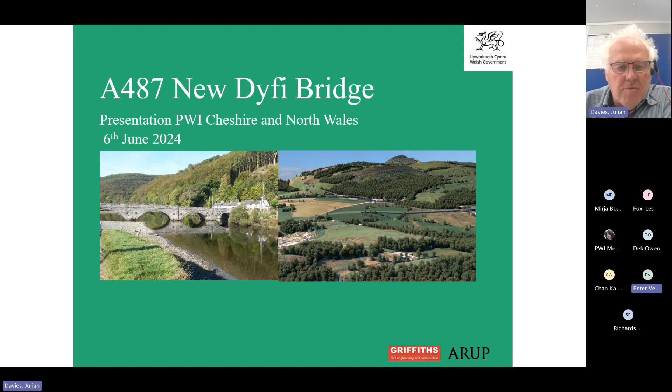Right. This scheme, the New Dyfi Bridge, is located in the Dyfi Valley, where frequent flooding occurs in the winter on the trunk roads network. It's located between the old Dyfi Bridge to the north and the railway line just to the north of Machynlleth. As a result, this section of road is frequently closed. It can flood up to 7-8 times a year, obviously resulting in communities being cut off sometimes for 24 hours, up to three days during a flood event.

It results in a diversion of 30 miles, and I'll explain in a minute the location. It's on a route from the north of the bridge, from the South Gwynedd area, quite a large geographical area, which runs to the nearest hospital in Aberystwyth. So the scheme itself is 1.2 kilometres long, but the viaduct is elevated over the floodplain. It's a 724-metre long viaduct, 20 spans. And obviously the idea of this scheme is to improve the resilience of this strategic trunk road route, one of the main routes in North Wales, and to provide connectivity for education, healthcare, and the rest of it, right?

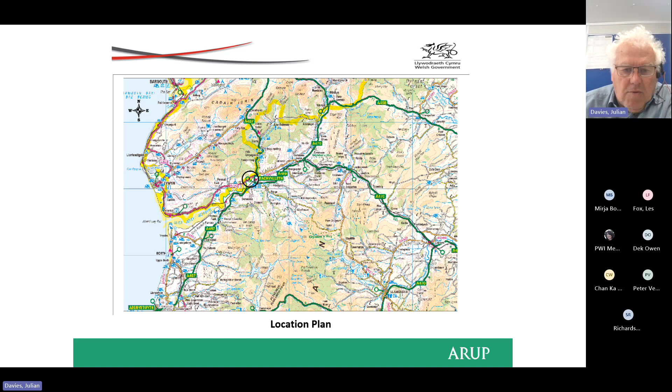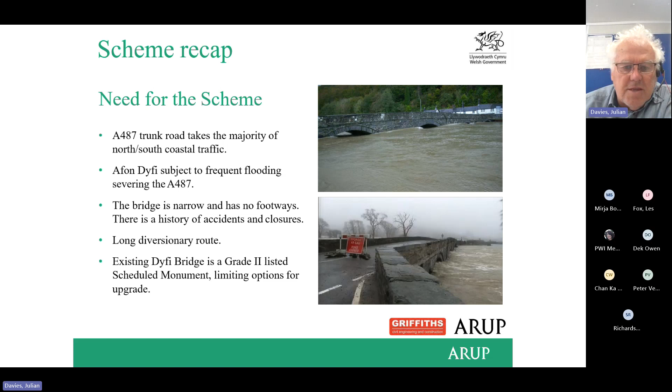Why are we doing it then? I said the road floods. That's the existing bridge, nearly 200 years old now, a masonry arch bridge. Substandard, narrow, low parapets, gets regularly hit by vehicles. And again, it's closed for repairs, or if not, for this flooding. It's a listed structure, so you can't do much with it. It floods south of the job under the railway bridge there, which cuts off the town. That's just the north of Machynlleth.

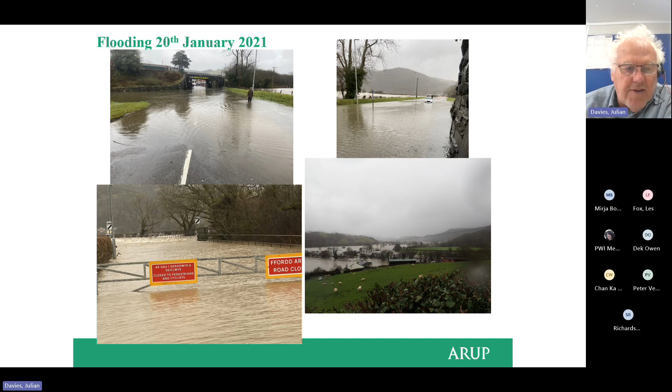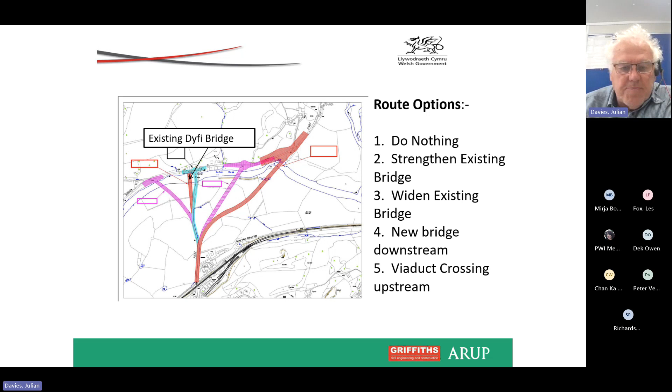They looked at online improvements to the west, and improvements upstream to the east side of the existing road. The online and western options were not appropriate. You couldn't get enough elevation. You ended up on a section of A road here, the A493, which is very substandard and would have required a lot of improvement to upgrade to trunk road. The two solutions on the east were preferred. The purple route there would have ended up with a roundabout in very steep sidelong ground, meaning massive earthworks. So the chosen scheme at key stage 2 was to take that route from the 487 just north of the Eco Park and drop back onto the line just north of the river. The scheme requirements from the Welsh Government were very prescriptive.

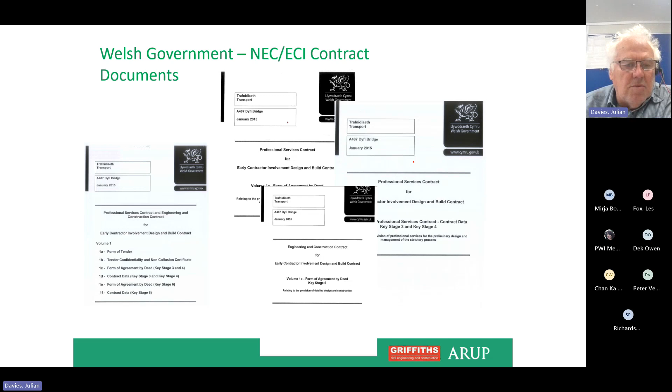One of our major solutions at tender stage was to straighten out the alignment and push launch the structure, because it's a very difficult site with the flooding, very poor ground conditions. So we thought we would push the structure out over the floodplain from one location on the south. We would then save all the wet trades. We would use precast units on the deck. So all the environmental pluses from that, quality issues, and reducing all the risk of working in a floodplain.

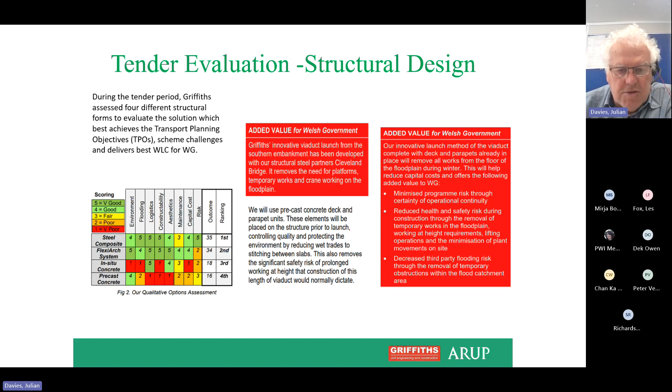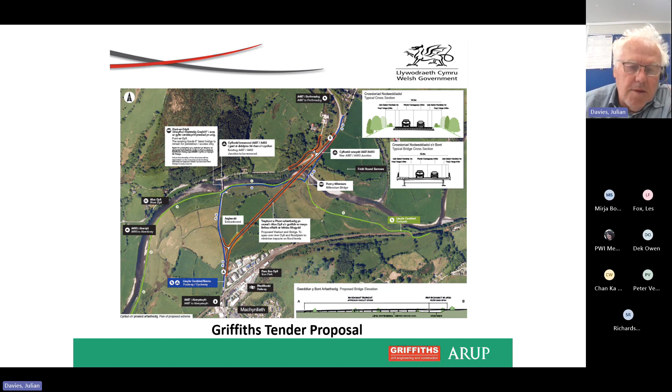And the scheme we ended up with was 170 meters longer. So we took out the embankment, extended the south abutment right through to this location here at the edge of the eco park. So we'd extended by 170 meters with a curved section of viaduct, with the original 550 meters there. So we ended up with a 720-odd meter long job.

There was this embankment obviously to take this up to a level to get it above the flood water. And you can't see it well in this drawing, but there's also an embankment to be constructed around this eco park, a little business park here, to protect it from the flooding, as part of it had flooded already during a flood event. So just to give it 1 in 1,000 year protection.

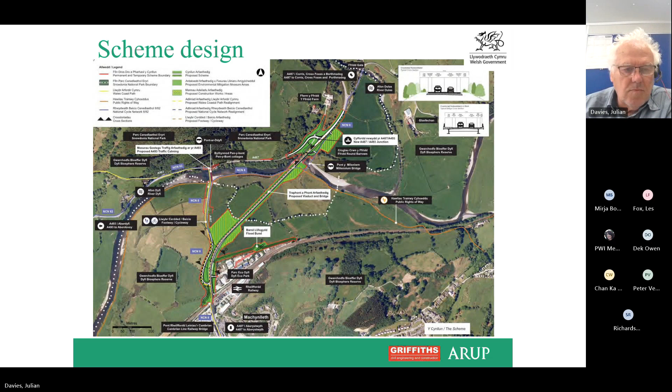For my discussion, I'll be splitting the structure because I'm going to concentrate on the structure. So I'll be referring to the curved section, which is this south section here, roughly 170 meters long. The ladder or straight section for the middle, which is where we did the push launch. And then we'll refer to the river crossing, because this again was a different construction. Rather than a ladder deck, it was a multi-beam, because the spans were much larger, 50 meter and 75 meter spans over the river. I'll be talking about those.

So a part of the BIM model there, you've got the steel deck, you've got these reinforced concrete columns, and a pile foundation extending some 28-30 meters into the gravels below. You've got a pile foundation to the southern abutment. We land across the river onto a spread foundation at the north abutment here. We didn't put piles here. There was no rock found across the valley floor. We hit some rock right by the river at Pier 19, and there was rock underneath the north abutment, but it was quite poor quality. So that's the shape of the thing.

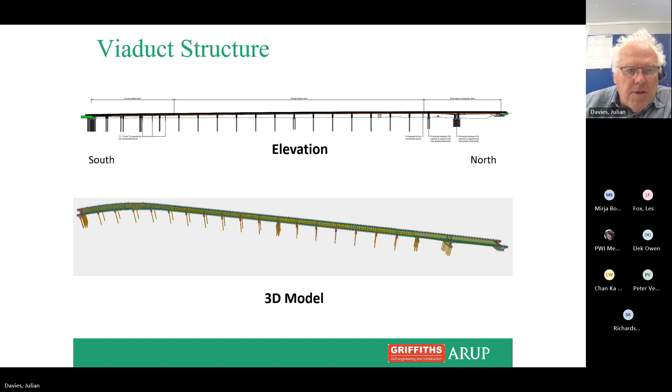We need to discuss a bit more detail, I suppose, of the structure itself. So we've got the 3 sections. This is the curved section where we've got these monopiles, 1.2 diameter, some 30 meters long through the gravels. Now, there's no pile cap here. The reason we tried to design out the pile cap was to reduce work in this very poor quality silt material. Otherwise we'd have had cofferdams, which you'll see we had to put on 1 or 2 of them. Extensive sort of temporary works.

So this was a monopile, 1.2 diameter, covered in a 2 meter reinforced concrete column with a ladder beam construction on top of it. It was the same through the main push launch, but then we go over the river spans. We have these 4 bigger beams called the multi-girder, which span 50 meters and 75 meters over the river.

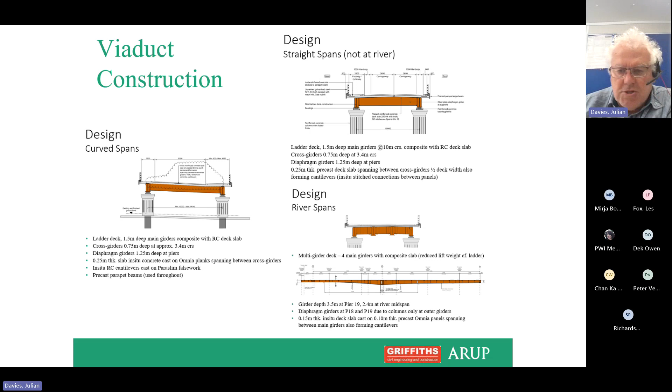This proved to be very environmentally and carbon friendly, because we reduced a lot of excavation, a lot of concrete, reinforced concrete, steel, etc., and much quicker, which you'll see from the photographs as I go through the presentation.

So, as I said, it was an ECI process. We actually won this contract in 2015. We took it then through key stage 3, which is design development, where we actually realized the flooding was a problem, and we developed it right through to public information events, environmental liaison groups, producing the ES, and then eventually we went to draft orders.

We managed to prevent a public inquiry because we managed to engage with all the stakeholders and remove all the objections. So we then moved on to key stage 4, which is the statutory process. So the draft orders were issued, objection periods, ministerial decision was made to progress the scheme, went through a whole High Court challenge. So at the end of March 2020, we were ready to go.

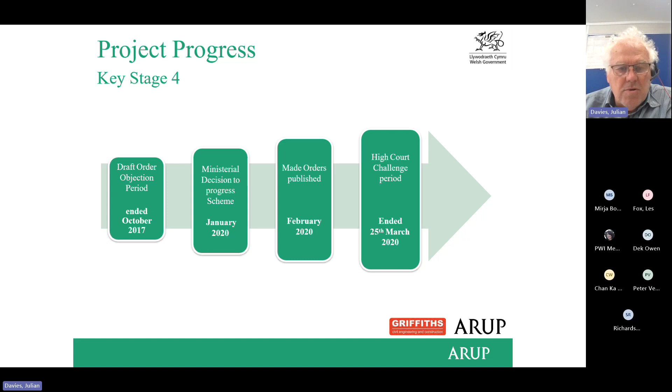But as we all know what happened then, COVID hit us. So we were just about to embark on some ground investigation and the job stalled. We eventually got back onto site to do the key stage 6 construction, and we commenced construction in spring. It was April 21. Now that actually gave us time, and one of the drawbacks to my mind of ECI jobs is that the design stage is missed out. So we were able to develop the design through the period where we were on hold during COVID.

So when we started work on the scheme, we had design drawings, and the biggest problem was actually, not delay, but critical to the job was ordering and delivery of the steelwork. So we were able to progress that procurement of steel very early on. So we moved on to actually doing the groundwork, but there were a lot of diversions. We actually put in the piling, we carried out this summer, and then we progressed through construction.

We finished the push launch very well. It all went well in about 15 weeks. Very good progress on that. And then we managed to get the steelwork erected over the river before Christmas in 22. We left it last year.

Then we were at a good place this time last year with all the concrete finished, and we were doing the finishings like waterproofing and all these dry weather jobs we thought were coming in the summer. It was wet in this area for 6 months from August right through to the new year, and it never stopped. So we were delayed with all that, but eventually got the bridge finished in February this year, open to traffic.

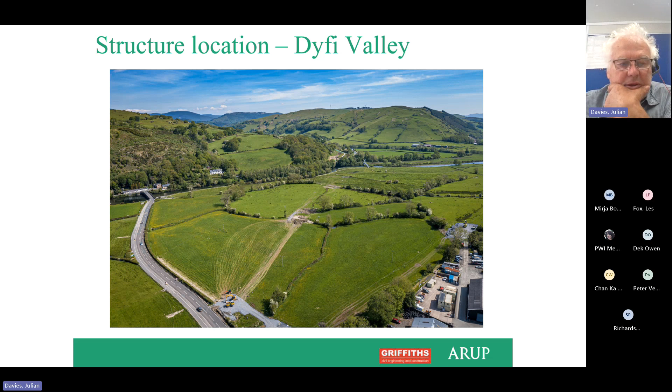So that's a view of the scheme before we started. This existing trunk road in the south here, and to the left of the picture, the old bridge. We were going to cut across that line, so we started to mark out the line of the structure. We were also starting to build the flood bund along the eco park. The ground conditions were very poor. You can see the standing water here.

We had to get haul roads out to get from the road to the river, which is about 500 meters, because we had to take steelwork and all materials down to the bridge to the south of the river. So we had a compound area on this floodplain here. We did raise an area which was out of the floodplain where we had some offices and a refuge for plant.

But we actually used timber matting to make the haul road, which we also then doubled up on to use for the piling platforms, and that was a bit of a success story because we just retrieved most of those now, and they're all still of some use. They were really useful, and we all know timber floats during a flood, so we had to moor them down with ropes. But that was one of the success stories.

You can see the flood bund on the right there, which runs up alongside the eco park. That had to be done early in the job because our work was going to cause further problems here. We were obviously then working very adjacent to the railway, and we had some interface with Network Rail to actually build our bunds into their work.

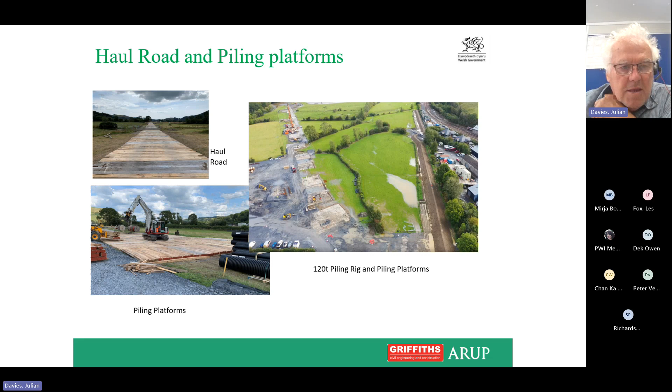So we started piling. This is the 120-ton rig here. This is a 1,200 diameter CFA continuous flight auger pile, which goes down to 28 meters. In that photograph there, you can see them. They actually plunge in the steelwork. So they bore the hole. They then tremie the concrete in through this auger, withdraw the auger. They then plunge the steelwork into the pile itself.

And there were 40 of those we did. We had to be very accurate with those locations because, as I said, those go up onto a 2-meter diameter reinforced concrete pier. We had to be within 25 mil with the piles because any eccentricity on that would cause a problem for the loading.

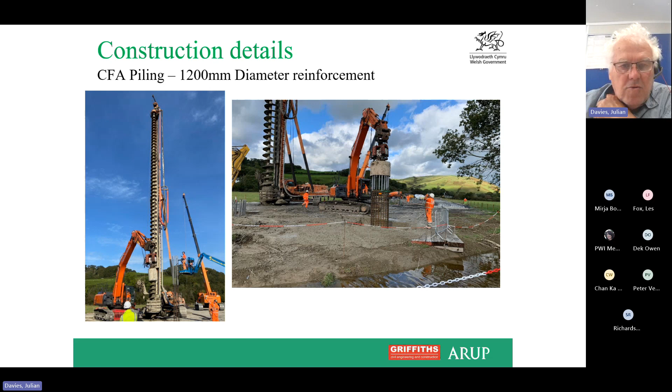This is where we had to do some cofferdams. Pier 19, the middle pier, was located on bigger foundations because the loads were heavier. So at this location, we had to put a pile cap, a reinforced pile cap, and there's a series of 750 diameter piles there. We had these on two of the columns where the loading was higher, but you can see the extent of the temporary works that were required to put these pile caps.

So when we just had the monopile, we were actually saving a lot of reinforced concrete, time and effort. So there again, you see the pile cap. The slabs are poured and the reinforcement is coming up here. And this is a monopile where we broke down about 600 mil below ground level just to found our piers. So the amount of work in these different scenarios was amazing.

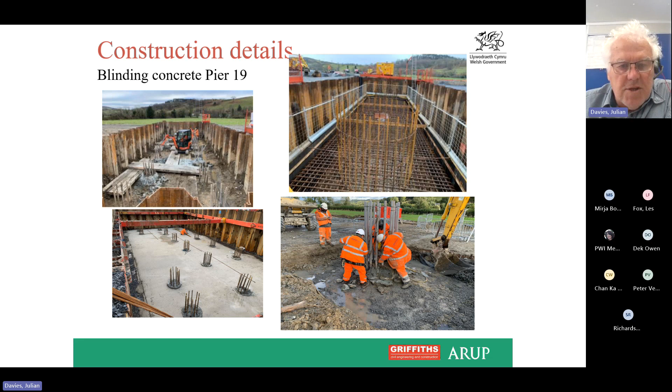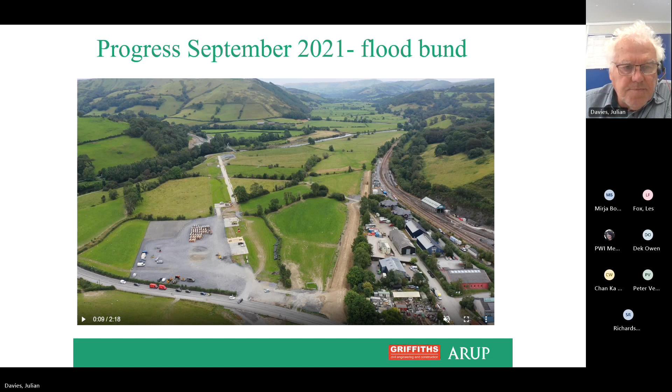So we started to progress. Obviously, the compound was developed. These are the timber mattings coming into our haul road. There's the flood bund, pretty well complete now. This is the railway line coming across here. This is the new scheme with our flood bund going around the eco park.

We had to interface with the rail embankment at this location here, which was quite close to the running rail, and that's on the western end. At the eastern end, it wasn't so close because there were some old sidings here, so there was a bit more room. But we did liaise with Network Rail right through the scheme. They were obviously concerned with the geotechnical influence of what we were doing, and you can see the influence lines here. So we actually tied into the embankments by benching in, all supervised by Network Rail and approved by the geotechnical design.

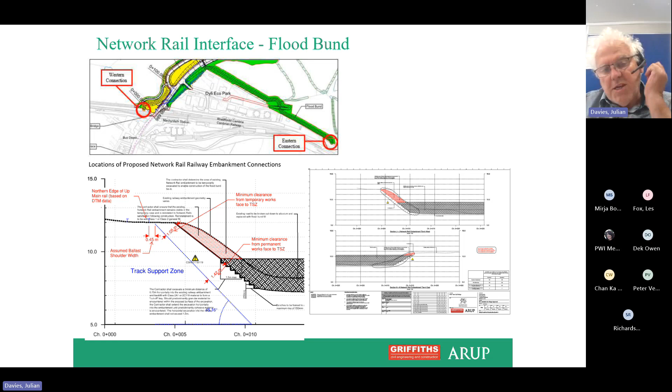It all went fairly well. You can see from these photographs, there's the rail embankment. We were building up and tying, benching in with this shape: 1 meter on the top, 1 in 2.5 side slopes, approximately 2 meters high. So it wasn't a massive embankment, but we did tie into the embankment. There were no issues there. There's been no problem. It doesn't really affect it.

There's the bund as well. You can see it tied into the embankment there, and then it's running parallel with the railway line and ties back in at the eastern end there. So again, you can see the bund there. Look, it's grassed over now, so it's blended in quite well. And at the south end, it comes round and ties into the running rail. There's the running rail there. This is Machynlleth Station.

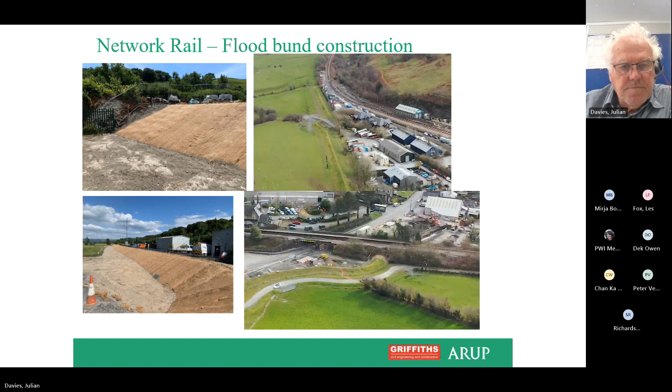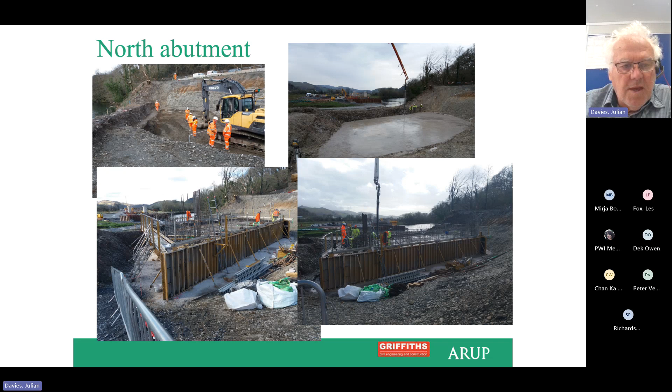Right, the north abutment. The abutments were conventional reinforced concrete structures. This one on the north was done without any piling, just a big spread footing. No real issues there, standard construction. And when we finished that, there's the finished structure there, so that was pretty straightforward construction. Cantilever wing walls there.

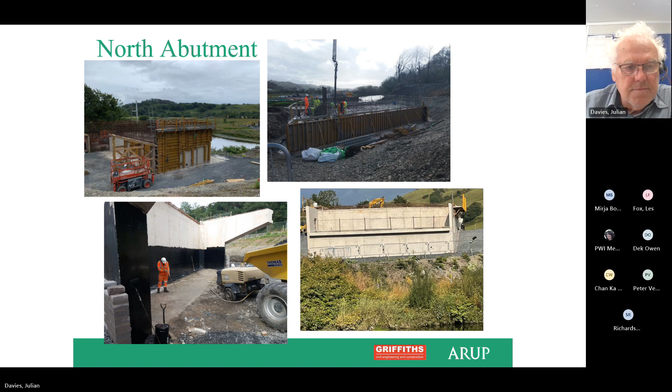We then get on to the erection of the bridge itself. So these are the reinforced columns that we built, all up through the job. These represent 34-meter span bridge deck units to go over there. This work here is the temporary works for our push launch platform. We had to do pile foundations because again the ground was so poor, and some of the loadings from the temporary works were quite large. So we got piling rigs in here, piling 600 diameter piles all through this for the foundations for the push launch.

The push launch itself actually comprised these three pairs of trestles. These were the back ones, which you'll see in a moment. It's where you actually fabricate your steelwork, and you fabricate a couple of spans' worth of ladder deck. And this one at the front here is the jacking platform where the jack is. I'll explain that in a bit more detail. And obviously, then you lift in your side spans and your cross members to form a ladder deck. So it looks in plan like a ladder. And this is how we did it.

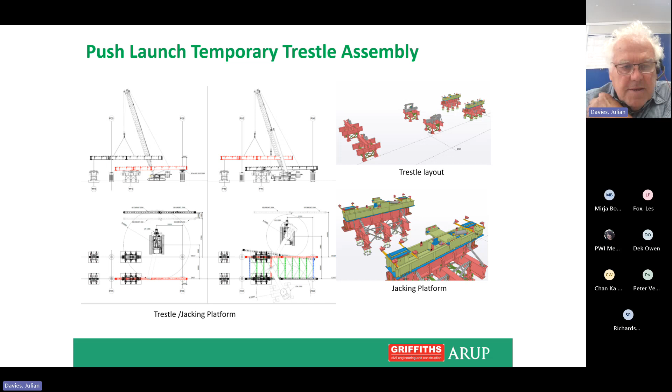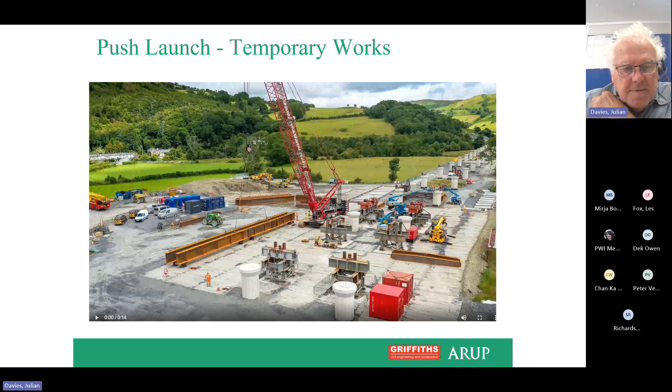So there's the steelwork coming in. It's landed on stools right adjacent to the work. This crane didn't move from this location, and our steelwork was coming in from Italy. They were coming in 17-meter lengths, and they were bolted together to form the 30-odd meter spans. These are the transverse sections. They were every 3.4, so it's 10 of them every span. They erect these on these trestles, and if I go on again, they're erecting the side span there, right?

So this is the front trestles you saw from that little plan location. Here you've got your jacking system all set up. You can just see the rams of the jack there. And what happens is this clamps onto the bottom flange of the beam, and it actually pulls the beam along. So hopefully if I press that button there, you'll see it moving along.

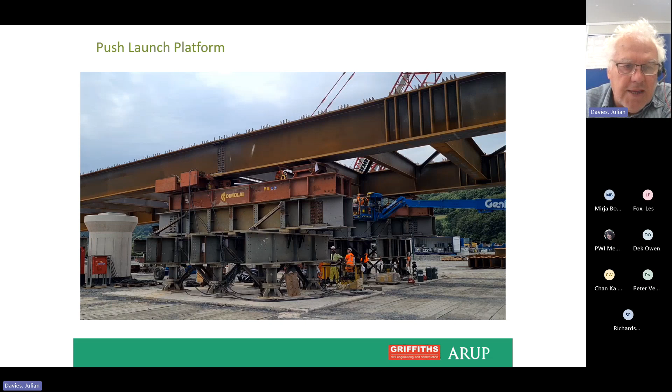That jack has a 2-meter stroke. So it then goes back and pulls again. So every stroke is 2 meters. The span was 34 meters. And we did actually do a 34 meter in one day, but generally we were taking 2 to 3 days to push one span.

And again, all the columns were set up with these roller bearings to actually let the beam roll across the top of the bearings. They were quite big. These are something like 2.5 meters long. There's also a guide at the side of them to keep this online. You can see the guides there, and we had a problem with that, to be honest, because if I just flick this one, you'll see the nose-in unit here. I hope you can all see that starting to move. It comes onto this roller bearing, kept online by this rather simple guide system here.

When we first started the launch, the nose-in didn't drop as much as was anticipated, so the nose-in was actually above this control. So we managed to go offline a little bit, but we jacked it back, and obviously it eventually came down. And after a little hiccup at the first push, we managed to maintain a tolerance of within 15 mil all the way through the push.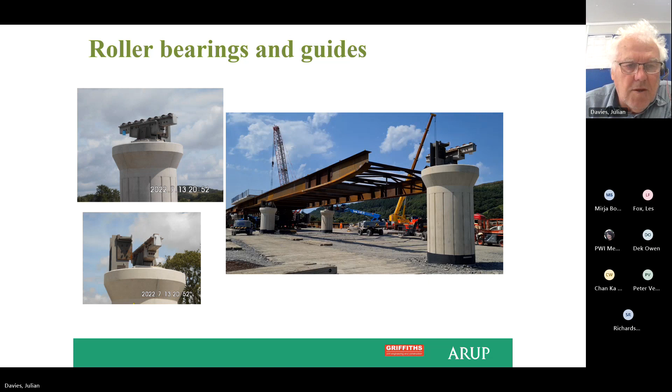Obviously, it's been checked every day, and there's measurements on the column to check any movement. Because these 2 meter diameter columns up to 5 meters, 6 meters high were located on a 1,200 mil pile, 20 meters in the ground. So there was potentially a lot of movement. So you can see the jacking system again, where it clamps on to the bottom flange of the beam.

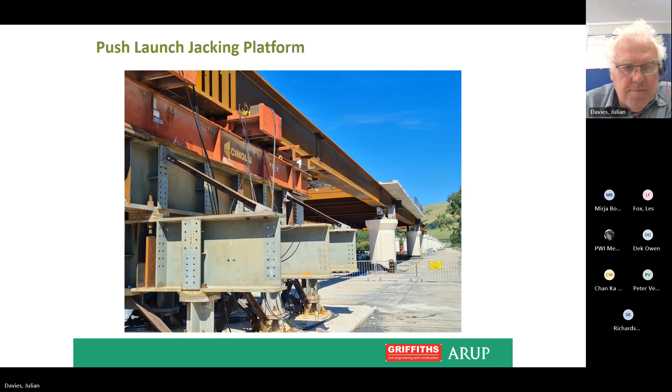There's a shot looking north. You can see all the piers are in place now. They've all got a roller bearing and guide on them. And so the push launch is going. I say we made really good progress. And what we were doing as well, you'll see in the next slides, this is a time lapse. So as the beam was being pushed forward, we had another team erecting precast deck units.

So hopefully you can see that this was like a factory workshop here, where the crane itself sat at one location, beams being delivered and dropped off right adjacent to it. A secondary crane then about 3 spans up to leave enough room for health and safety. This is the bridge deck units being laid down here, both sides of the structure.

So this is the first few beams going on the trestle. That's the nose-in again, you saw before. So that starts to all place now, starts to push. And as it got up a little bit further, we put these precast deck units on, and we found we could actually work.

We placed them when it was obviously not being pushed, but we found we could work on that deck as it was being pushed. So the lads were able to put up the edge restraints and fix some of the steel for the stitching during the push. So it helped us along with progress. And ironically, we had some of the best weather as well through this push launch.

So there you can see the beams on there, and the slabs on the floor ready to put the next one on. So it became a bit of a conveyor belt there. All went very slick, to be honest. So as they were erecting the beam here, we were lifting the beams on, and then we'd push and then carry on with the edge restraints and fixing steel. It didn't go quite as fast as that, but looking back on it now, it went quite well.

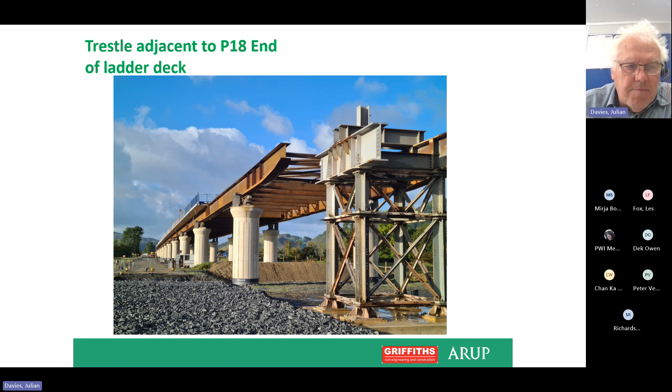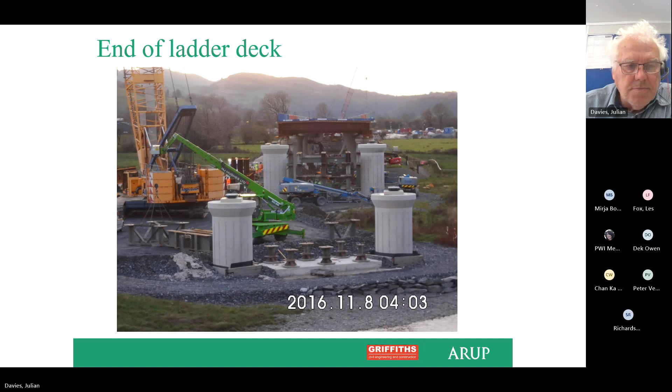multi-girder, so that's the end of the push launch looking south from the river. We've got a girder across there, which is the cross girder, and then our big girders came down over the river and joined in, which is about a quarter point of that span there. So that was the end of the push launch, start of the big lifts. So there's a shot of the whole push launch. We pushed out 400 meters of bridge, about 4,000 tons there. So you've got roughly 400 meters of bridge deck in place. Obviously the units are in place, but they aren't stitched together.

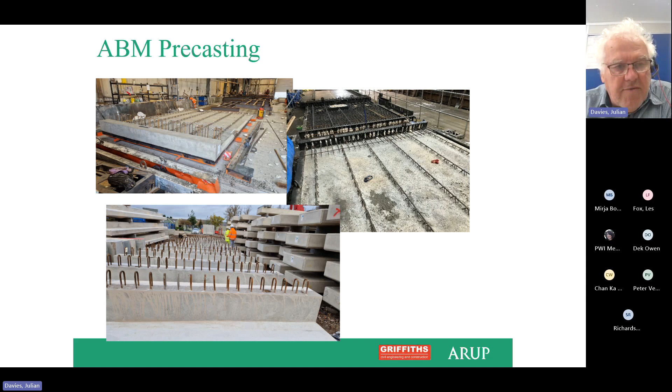So precast yard, we chose to go precast on all the deck units, obviously for quality, to avoid wet trades with the floodplain, all the environmental issues we've had. It was in a very sensitive location, this river valley. We're next to a high quality fishing river, a lot of water around us, high water tables. We had to do a lot of water monitoring, silt protection. We had bunds and settlement pools everywhere. So it was very high quality. We were being watched by Natural Resources Wales, sorry. We had to put FRAPs in for everything. So we chose the precasting option as a best solution.

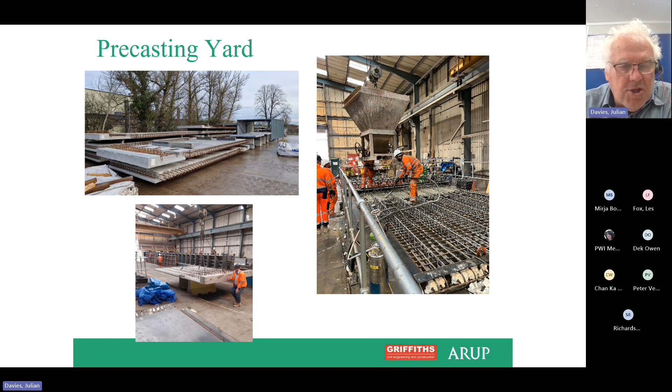So these are some of the units we had made in ABM yard in Nottinghamshire. And then we lifted them on, as you saw in the video there, and we held them on temporarily as we were jacking. On the push launch, the deck unit was full depth over the river, which I'll show you in a minute. They were half depth, so we were able to save on all our temporary works for the cantilevers. So there's an in-situ pour on top of the half deck, so we had some in-situ work there.

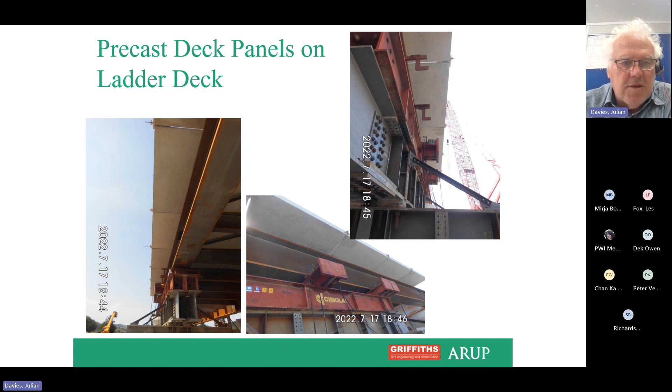For the curved section, we had to revert to conventional because it didn't lend itself to precast units. It was curved. It was of different widths, so there were lots of bespoke units and it wasn't attractive to the precast boys. So this is the slabs in place. Obviously, the stitch joints to stitch them together, and we were able to fix the steel, as I said, when it was being pushed. And at the end of the day, we did all the concrete into these stitch joints when we finished the push launch and the bridge was still.

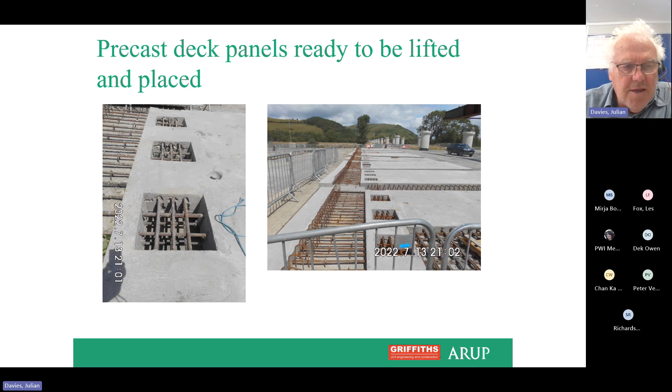These other units fit over the shear lugs on the steel. There was a lot of thought going into this because you can see there's not a lot of room. These slabs are 250 thick. The steel is quite heavy, both faces. We've got little places to go there. So how do you get the steel between them? I'll show you this one as well.

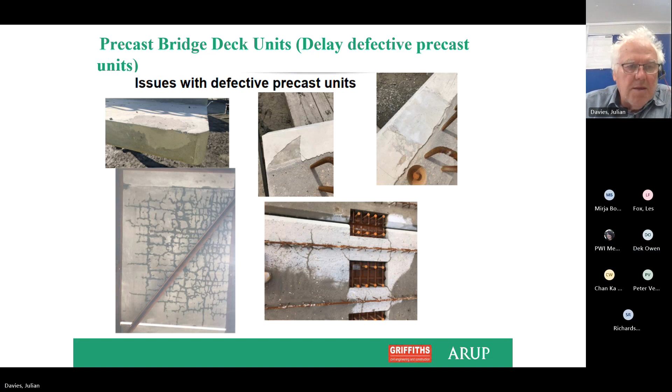So not all good. That's the top of the beams, I say, and these shear studs had to fit between those sockets. We didn't have one clash on the whole deck. We didn't have one clash of those shear studs, and that was credit to Arup, our steel designers, who moved these locations of these studs, and our precast suppliers to get it all right. So that was a good news story. I thought we'd be with the sledgehammer banging those around, but we were quite good there.

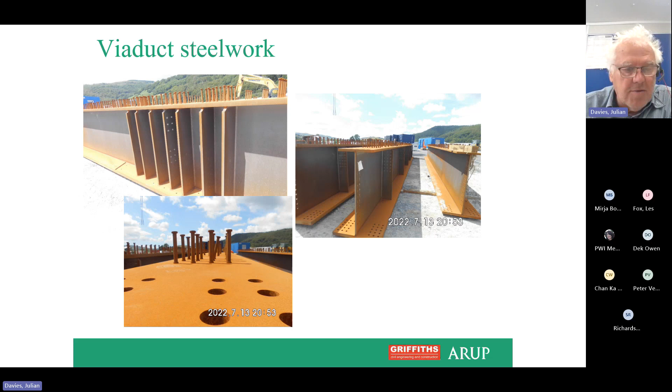So again, you can see them. These are the stitch joints over the piers, and obviously there's going to be an edge beam as well, an L-shaped edge beam over the whole length here, stitched into this. So still quite a lot of work to do in situ fixing with the precast, but the precast itself was a very good quick solution for the decking. Again, you can see there we got the whole length pushed out. Some 400 meters of bridge there.

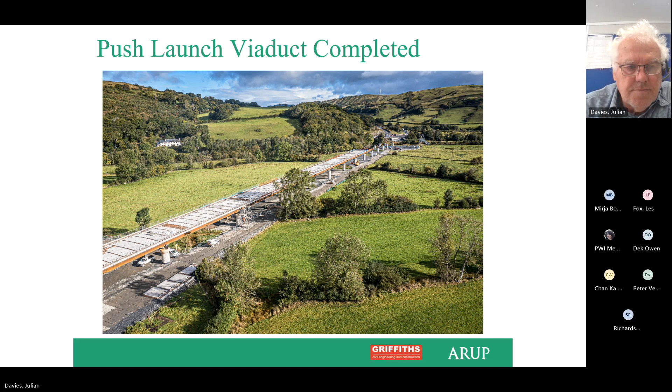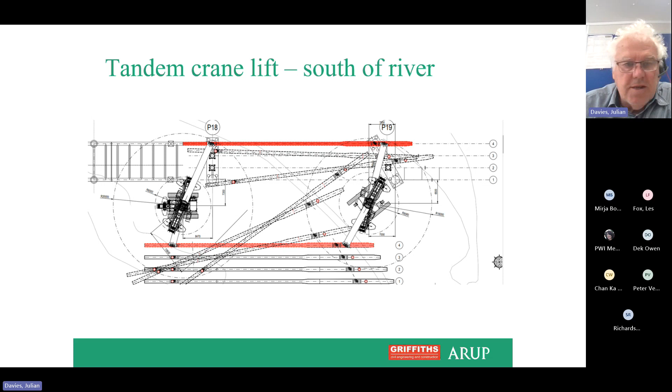Right, now we came to the big lifts over the river, the multi-girders. This is just a layout. There, our ladder deck, which I showed you, stops on the quarter point there. These are the beams, 4 number beams laid down, ready to lift in. Cimolai, our supplier, decided to do this with a tandem lift, which we weren't totally happy about. You normally lift big beams in like this because they're very slender as brace pairs, so they're stable. So we actually lifted these in, roughly 160 ton of weight there with those beams because they were quite long. They're 70 odd meters long. That's the two cranes, and that's the size of beam they were lifted in.

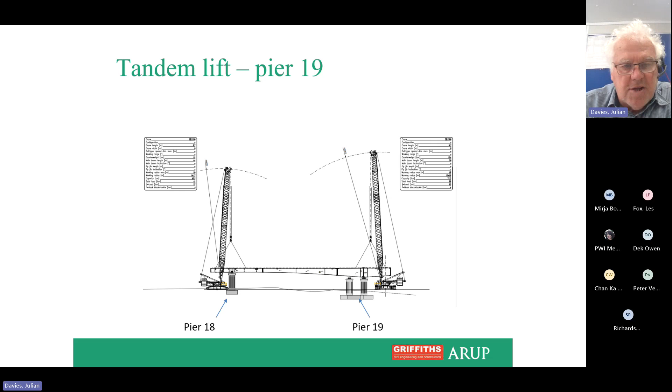So there we are, the 2 cranes. This is the crane you saw in the previous pictures from the bottom. There's a 350, that's a 250. It's regarded as what they call a complex lift because things can go wrong. The beams were stuck on the outside and had to be maneuvered through into place. So there was a bit of head scratching on that one. And obviously temporary works support. It's a bit dark, that photograph, but with the last one.

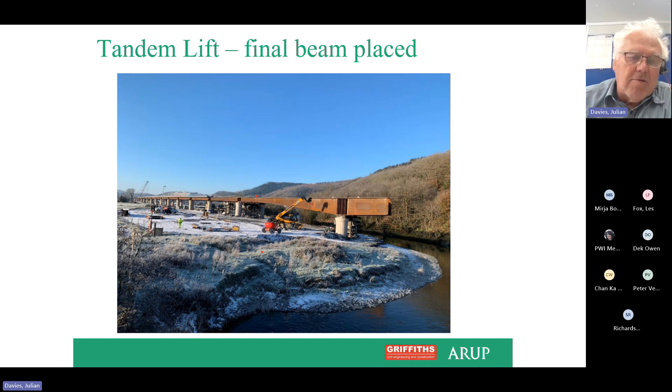So there's the last beam in place. So that was the end of the ladder deck. And that beam there, I say, is 70 odd meters long, 150, 160 ton with all the weight on it. And it all went in really well without an issue. So it saved us putting a big crane in here, because we would have required a massive crane here, 1,000 ton plus, which in this location would have been a nightmare because it's all in the floodplain. We had to build it all up. So we avoided all that by having these 2 mobiles, which could move quite quickly out of the floodplain if there was a flood event. We then went into north.

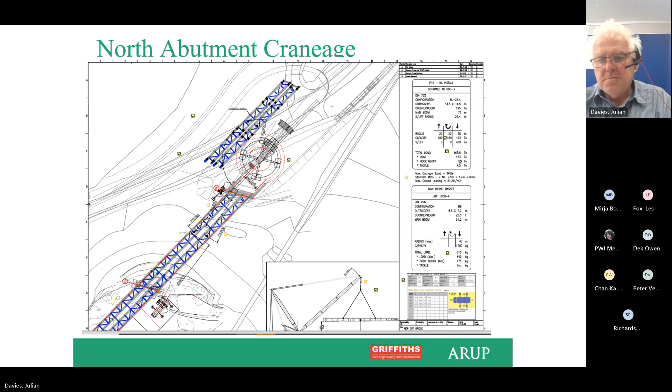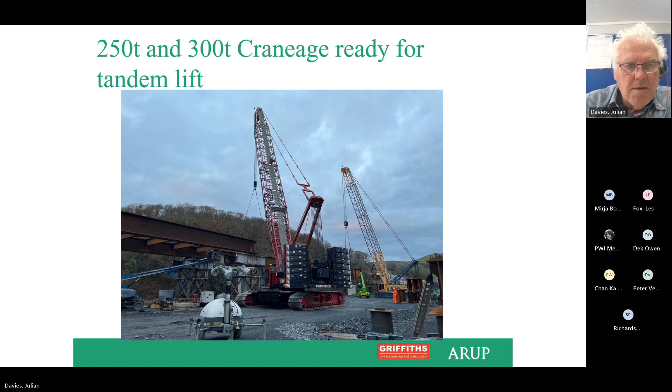I'll flick, sorry, I know I'm there. Are you seeing multi-photographs now? Gosh. Sorry. Must have pressed the wrong button there, sorry.

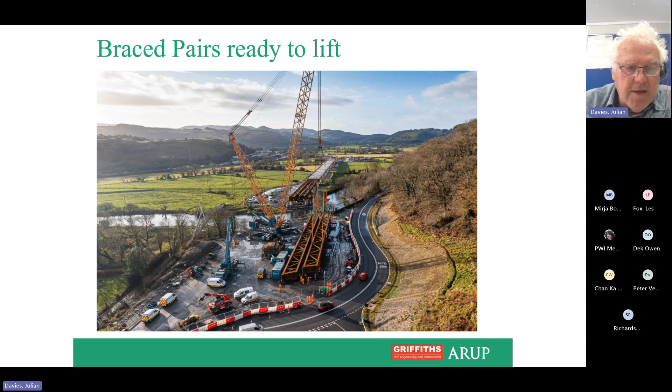So we lifted these in with the braced pairs, and these are welded connections there. So you've got the beams welded together, all braced together. A total weight here of 170 ton, quite a big radius because we're well back. This crane takes nearly a week to erect. It comes with an auxiliary crane and about 28 artic loads of boom and counterweights. So this came from the north of England. It actually managed to break down on the way here, but we managed to lift this in the week before Christmas.

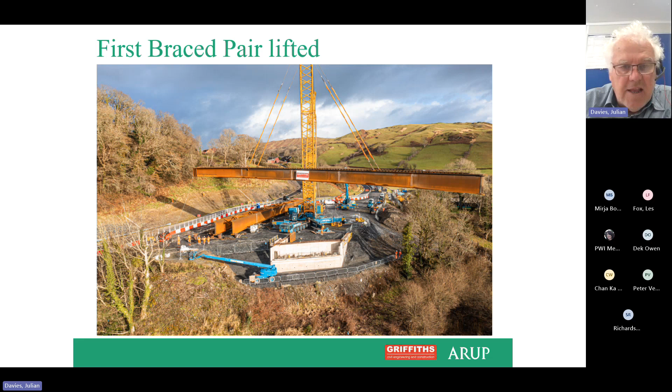The weather wasn't too bad, so we lifted in the beams, and you can see them there on the side. The weather in Machynlleth was very nice, but suddenly it went black, rough, and this is like a big sail in the air, so we had a bit of problems trying to hold that, but we did get it placed quite well. And you can see there's the beam coming in. Behind here, you've got actually a load of boys up on cherry pickers to do the bolted splice connection. So again, that was another milestone for us.

That's the second beam going in actually. So there the beams are completed over the river. We then went back to the curve section. So the start of this piece here was the ladder deck we'd already placed as part of the push launch. We'd removed all the temporary platforms now from the push launch. We now started to construct the curve section from this location back to the abutment. You can see it's curved, it varies in width. So we had to have cranes at every span here, which we saved doing on the main run because we pushed it all from one location.

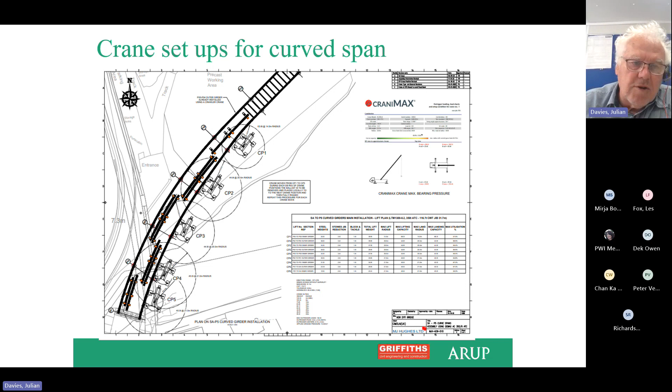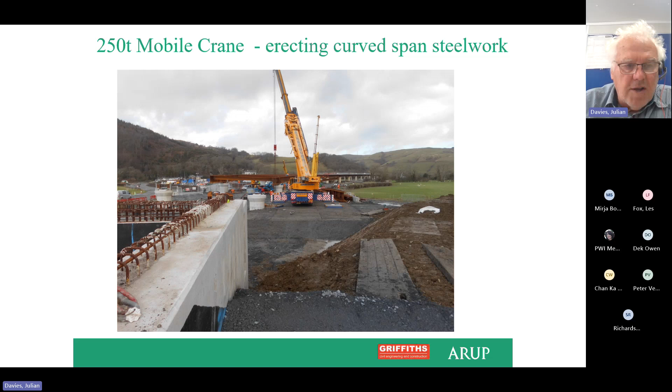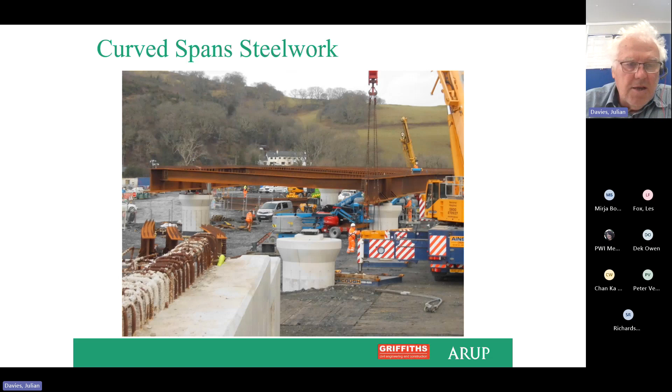So here we built conventionally, put the side spans in, transverse spans in, right back 5 spans going back through, getting closer. You can see the cross fall now in the steelwork. You can actually see the verge kinks, and that's why the precast manufacturers weren't interested in this. It was too complex. That's a shot of it.

So there we are. That's the whole steelwork finished now with the profile of the steel there ready for the deck. Because we're going to go in situ now, we had to put permanent formwork between these beams. We have to do the paraslims to get the cantilevers. So we're back to more work. Obviously, we saved all that when we used precast units. So there's a diaphragm at the abutments. There were diaphragms across to hold all the beams together.

So there we are. That's the whole bridge now. So we've got the push section in the middle. We've now placed the beams north. We've now finished all the steelwork on the south. This is the permanent formwork going in, and we were on at the top here as well. I think we were delayed up here with replacing those precast units. That held us up about 3 months because we intended to come in from the north, and because that was held up because of those units, we had to wait till this was finished to get access on the deck.

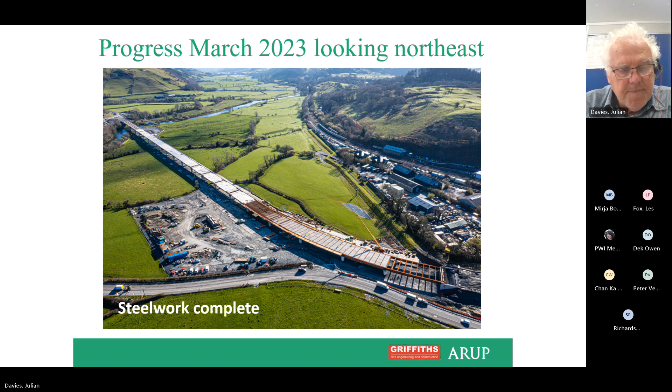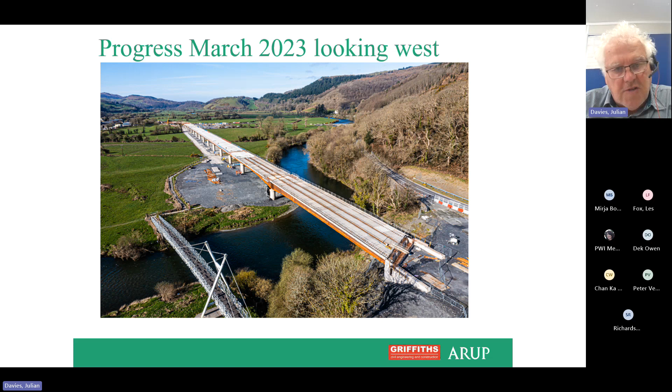So that's the north section advanced now as well with all the beams on. And there's a thin section of reinforced concrete to go on top of that, because we got the half deck, so we've got all the soffit covered and supported. That's the approach from the south. Another shot looking down it now.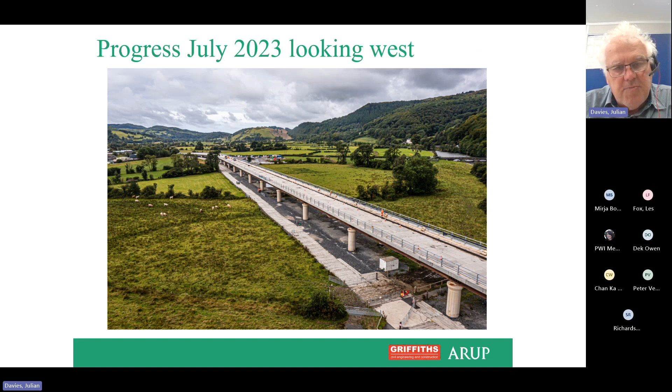So we're starting to put some curbs in there, but as I said earlier, we were at a good place in August last year. We thought we were going to get some dry weather to do all the finishings, all the waterproofing, and it rained, I think, from August right through till, well, last month really. So it's been very wet and been slow progress. So all the finishings took a time. So the parapets are on. I think we put in the drainage kerbs, and that's the last pour on the north there now as well.

So you can see the scale now of the structure. You can see the height, the embankment up here as well. The height out of the river, we're about 3 meters above the field level here. This was our compound area. And that's the full Dyfi Valley there, which floods.

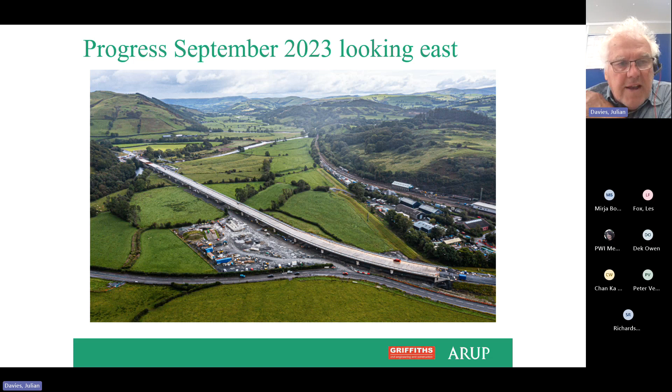I'm aware that I'm probably running over a bit, you know.

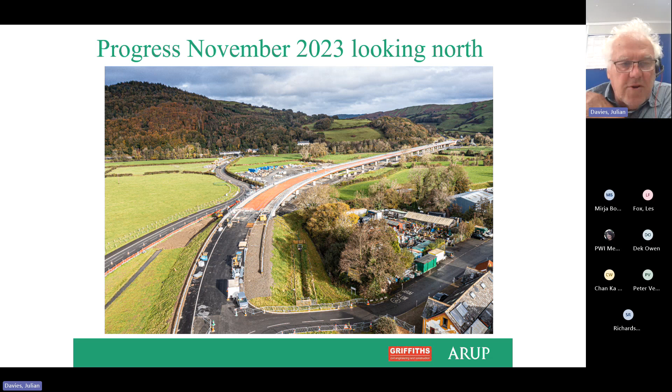So there's finishings, there's the waterproofing on, surfacing work on the approaches. One thing we had to do, because we'd jacked this and we had the temporary bearings, you saw the roller bearings. Those roller bearings were quite high off the top of the plinth, about 600 mil. We needed to jack them down now to actually put in the permanent bearings. So they were jacked down 600 mil, and we had to do it in 200 mil increments. And that was a job that took us longer than anticipated because there were so many spans and we had to do it in 200 mil increments starting from the middle.

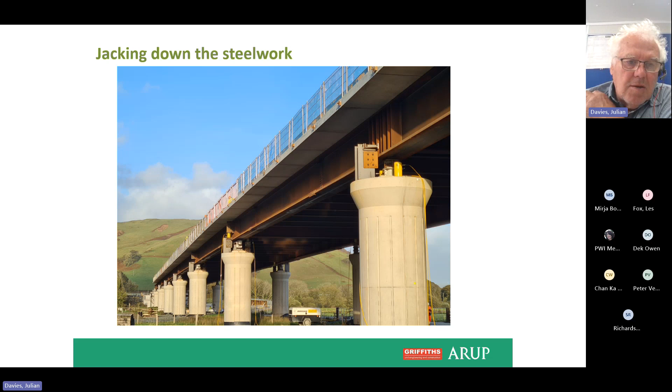It required a lot of jacks and a lot of temporary work. So it took us nearly 3 weeks to jack the bridge down onto its permanent bearings, which here they are. We have to do the bearing plates, the sort of set underneath. These bearings had to be set in the evening when there was the least amount of temperature movement. We did have a problem with one where the steel had obviously warmed up in the day and it cooled and moved down at night, resulting in some issues with the bedding mortar. But luckily, again, it all went fairly well.

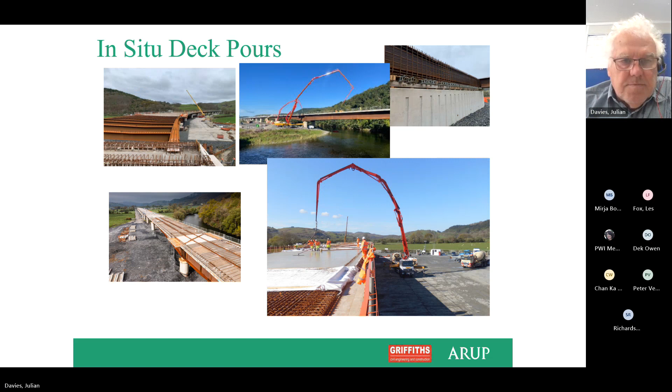Just general construction there. So your deck construction's ongoing above. Just concrete pours with pumps. That's your waterproofing. The waterproofing was 3 systems with primer, a first coat and a second coat, and then you put a tack coat on top prior to your surfacing. Infill in the verges where the kerbs are in.

This is the joint. The bridge is 724 meters long. There's a fixed joint in the middle, pier 11, and the movement each end. This movement joint is quite big. It's a modular joint. Again, we had a slight delay with this because, like everything else, we don't make anything in this country, unfortunately. It was coming from Spain.

There was all sorts of issues with fabrication, with their shutdowns and everything. So we were late getting that back. We should have been in before Christmas, and then eventually it arrived in January. So we managed to get it finished and open beginning of February. And that takes up movement up to nearly 300 mil.

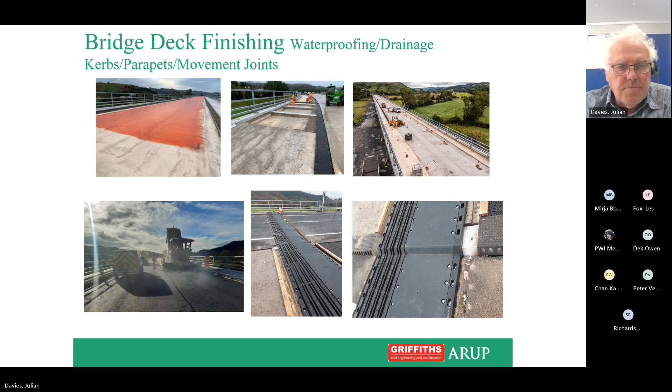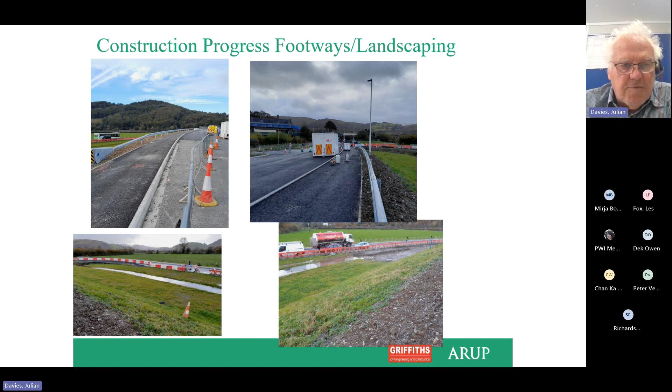Again, a few finishings. This is approaching the approach embankments, finishing off footways and things generally. Usual finishings, footways, street lighting, the like. Surfacing, we did some with Tarmac construction. We're part of Tarmac, as you may know, but we did it with our own surfacing gang.

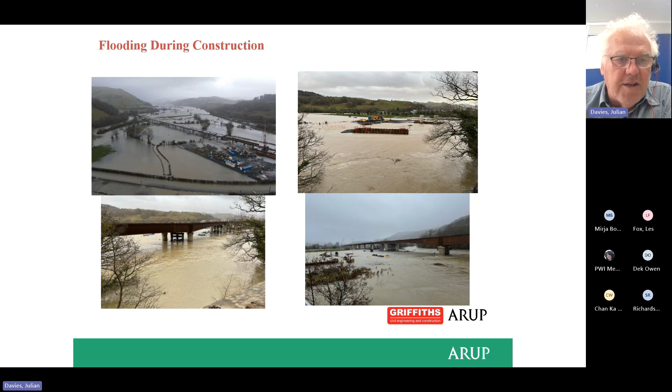We'd have a warning. We used to watch the river levels, and we had a level on the gauge of 3 meters. If it was over there and rising, we'd pull out. And we were lucky in the first year or so, but we have had a few events this year over the winter, a couple of events, but nothing major really. We managed to cope with the flooding. You can see the area there where the bridge is going on. But this is the worst thing we had.

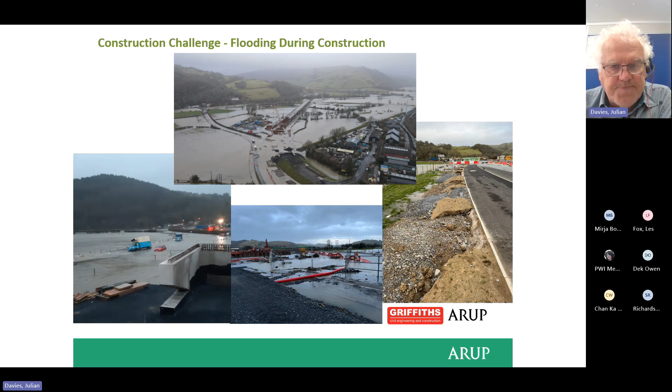The local authority would close the road, and they were always late, and people were desperate to get through the flood and would try and negotiate the flood water. And this lorry was there from 2 o'clock in the morning, rescued by the fire brigade. He nearly tipped his wagon over. This is the mess we had on the road when we had all the temporary works, barriers, everything moved, and the scour we had of our verges, because although not terribly deep, the water's quite fast flowing and aggressive. So, and there's some more flooding shots there.

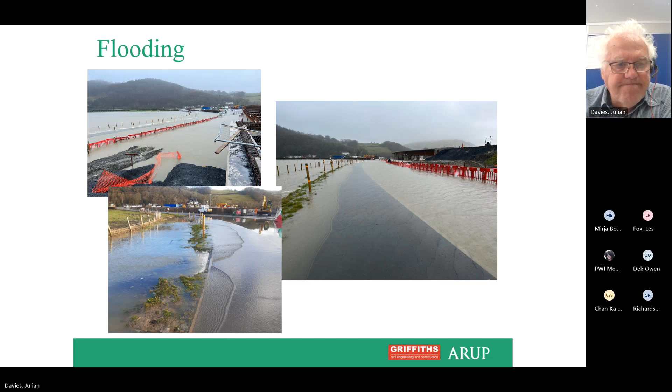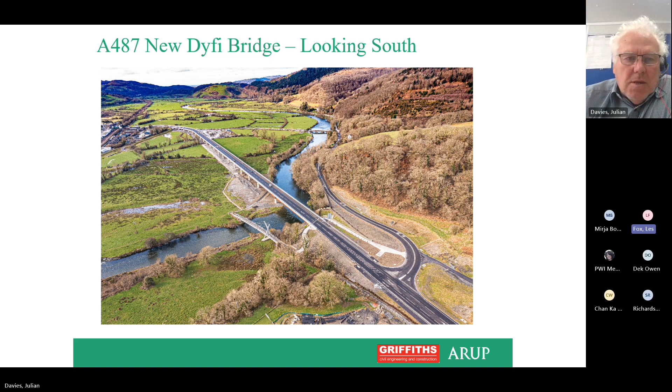Right, thanks. The other question I had: although I'm a permanent way engineer for most of my career, I have done a short stint in drainage and highways. On similar projects in the floodplain, the Environment Agency were quite hot on making us provide flood storage compensation where we're building within the floodplain. Did you have any considerations like that? And was there anything that dictated the final highway level? Did you have to design it above a certain flood return period level?

Yes. Again, I jumped over that, but it's designed for 100-year plus climate change and a freeboard. This last beam here was actually slightly shallower to maintain that, because the other critical thing was the railway bridge just south of here, and you had to get under the railway bridge. So the vertical alignment was key, to avoid departures on the horizontal and vertical alignment. And from underneath, we had to reduce the beam depth to maintain the water level.

So it is quite low at this end here. I'd say it's less than 3 meters actually. The drainage runs south off this bridge in drainage channels. It drops into the abutment there, and it comes through a channel back to the river.

Underneath here, it's not an attenuation pond as such, but there's a pond in here which is designed really to deal with, should there be an accident on the river and a spill, and there's a shut-off valve on that. So that's the only attenuation they've got to protect the river from any sort of fuel spills. Because you're in the floodplain, there's no location to put that.